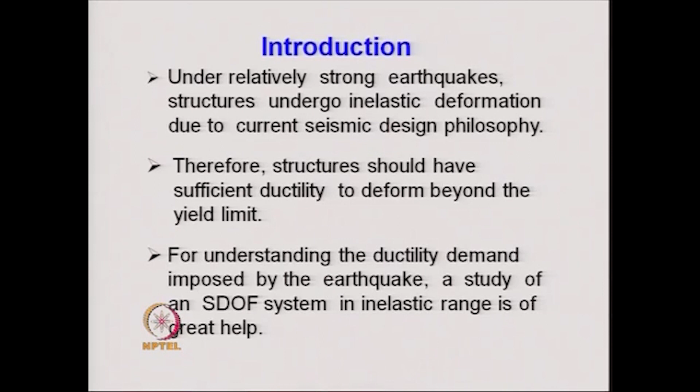Generally, the ductility demand imposed by the earthquake is understood with the help of an inelastic analysis of a single degree of freedom system, and that is what we will start with. However, the nonlinear time history analysis of the single degree of freedom system under earthquake is used not only for understanding the ductility of the material or system, but also to understand some more important things about the inelastic resistance of structures for earthquake, which we understand with the help of the so-called inelastic response spectrum.

Similarly, for the multi-degree of freedom system, the nonlinear analysis is useful in understanding the nonlinear behavior of multi-degree of freedom systems under earthquakes, and therefore the need for nonlinear or inelastic analysis of multi-degree of freedom systems under earthquake is also an important issue.

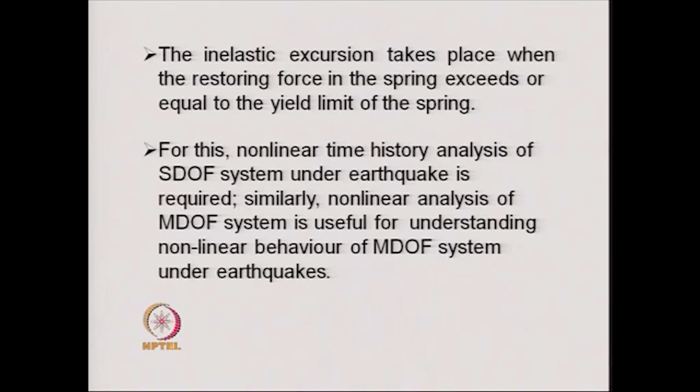In many cases, if we want to obtain the seismic risk of a structure, then one has to go up to the collapse of the structure, and therefore a nonlinear analysis may have to be performed for the seismic risk analysis of structures. The inelastic response spectrum, required to understand the inelastic resistance of structures to earthquake, constitutes an integral part of the inelastic response analysis of structures. We will specifically look into the ductility and inelastic response spectrum of earthquake subsequently while discussing this topic.

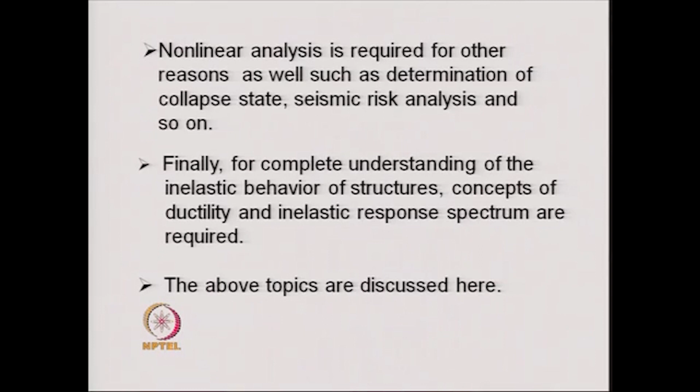Now, what we mean by nonlinear dynamic analysis here is that if the structure has nonlinear terms either in inertia, damping, or stiffness, or any combination of them, then the equation of motion becomes nonlinear. However, the more common nonlinearities that arise are due to stiffness and damping nonlinearity. Inertia nonlinearity is hardly encountered, so here we will be mostly talking about nonlinearities arising due to stiffness.

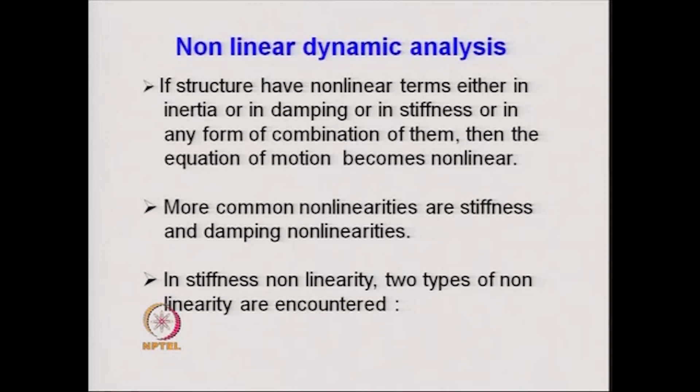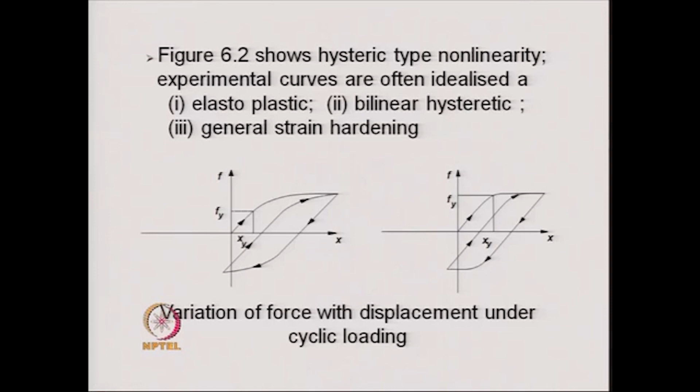The hysteretic type of nonlinearity is shown in these figures. The experimental curves that we get from the inelastic behavior of the structure during testing are of this type. Because of the nonlinearity, the loading and unloading paths are different, and as a result it forms a hysteretic loop. The area under the hysteretic loop, as you know, is equivalent to the energy that is dissipated. The experimental curves are idealized like this.

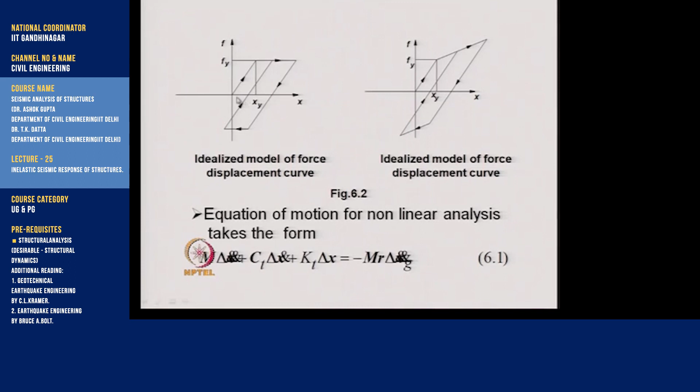The most common idealization used for the analysis is the elastoplastic model. That is, in the beginning it is elastic till the yield point, and once yield takes place it becomes fully plastic — under that constant stress, the displacement or strain continuously occurs, and then there is an unloading. So this is a bilinear model: we have an initial stiffness, and after the yield point the stiffness changes, following the top line curve, which has less stiffness than the initial stiffness.

And when it undergoes unloading, it undergoes a displacement or deformation which makes a slope parallel to the initial stiffness, or the slope we get in the load-deformation curve at the initial stage.

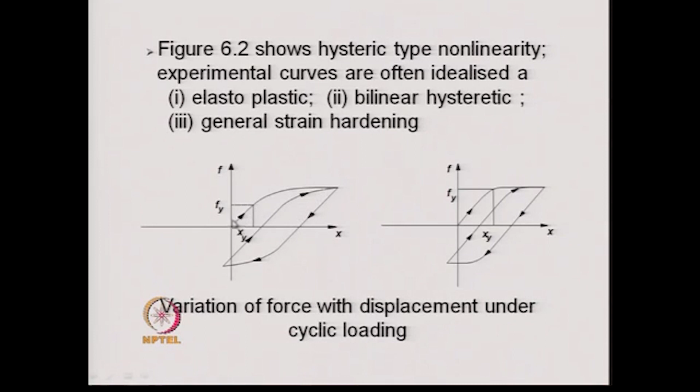The more general type of load deflection curve that we get is the general strain hardening curve. Here we have a curve that represents the load deformation behavior till it undergoes unloading, and at the state of unloading, the slope of the load deformation curve is parallel to the initial slope or initial tangent to the curve.

The equation of motion for nonlinear analysis is done in the incremental form. Equation 6.1 shows the typical equation we write for the solution of the nonlinear problem. It is the same equation used for linear analysis, but x dot and x double dot are replaced by delta x dot and delta x double dot, and Ct and Kt represent the stiffness and damping which change, having values Kt and Ct at the instant of time t.

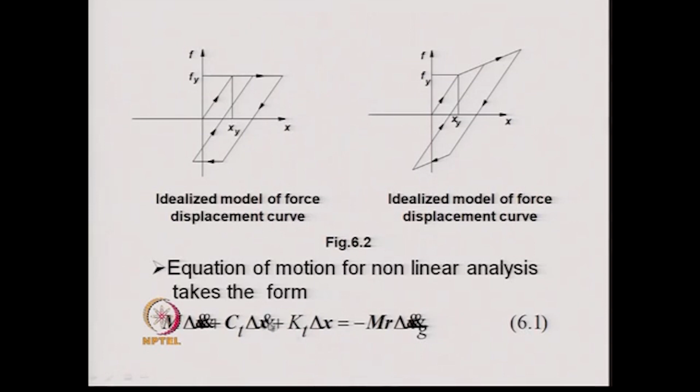These are called the instantaneous values of the stiffness and damping coefficient. The meaning of the incremental form of analysis is that during the delta x displacement, we assume the stiffness to remain constant during that interval, and the damping also to remain constant during that interval, and the entire analysis for this interval is carried out in the same way as we obtain the analysis for the linear system.

The equation of motion for a single degree of freedom system follows from the previous equation: m is the mass, and Ct and Kt are the instantaneous values of stiffness and damping. We write minus m delta x double dot g, that is the incremental ground acceleration that takes place within the interval delta x. Note that delta x corresponds to a time interval of delta t, that is, in the time interval delta t a displacement of delta x takes place, which is an unknown quantity to be found out.

Once we are able to solve this equation by some numerical technique, the same kind of solution can be extended for a multi-degree freedom system. However, generating KT and CT for a multi-degree freedom system involves some kind of complexity that we will address later. If we go for an analysis without the hysteretic type of nonlinearity, that is, the general or geometric nonlinearity shown before in this curve,

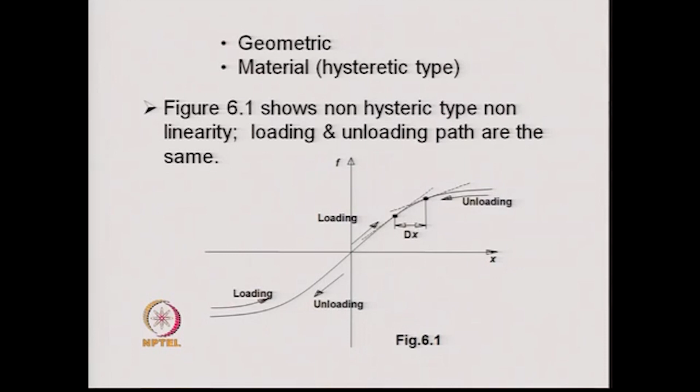Since we do not know this point, we cannot find out this average stiffness. If we wish to include this average stiffness, then one should go for an iteration: we start with an initial stiffness, solve the problem, and that gives a value of delta x. Once we get delta x, we can find this point and the stiffness there, then add it to the previous stiffness, divide by 2, take the average stiffness, and make a solution again. That gives another value of delta x, and that is how we carry out the analysis in an iterative fashion until we get convergence.

However, for a small value of delta t, this iteration may be avoided, and in most cases we take a sufficiently small value of delta t, so that with the stiffness taken at the initial point, at time x t, we calculate the value of delta x using that stiffness only.

Newmark's beta method in the incremental form is used for the solution described here. These are the two cardinal equations or relationships used in developing the Newmark's beta method. We discussed these two cardinal equations earlier when discussing the Newmark's beta method of solution for the linear system; there the difference was that these variables were x, not delta x. Here it is delta x.

So we write delta x dot equals delta t multiplied by x double dot k, plus delta t into delta x double dot. Similarly, we write delta x equals delta t multiplied by x dot k, plus delta t square into x double dot k, plus beta delta t square into delta x double dot. Now, from this equation 6.4, one can find delta x double dot in terms of delta x, x dot k, and x double dot k.

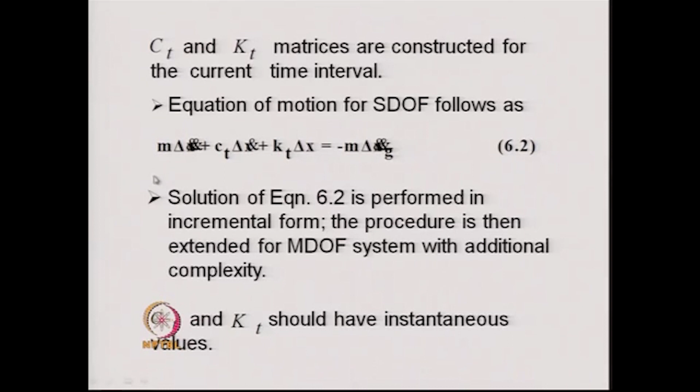Then we can substitute the values of delta x double dot and delta x dot into the dynamic equation of equilibrium, represented by 6.2. Here delta x double dot and delta x dot are written in terms of delta x, and finally we get an expression given by equation 6.7, written as k bar delta x is equal to delta p.

So the entire left hand side is now written in terms of an unknown variable delta x only, where k bar is given by this. You can see we know Ct and Kt, because they are the instantaneous stiffness and damping at time t, and m is known, therefore the entire k bar can be calculated. Delta p consists of the incremental earthquake acceleration minus m delta x double dot g plus these terms.

In these terms, x dot k and x double dot k are known because at time t these values are already known. So one can solve this equation to get the value of delta x, and once we get delta x, it can be substituted in equation 6.3 to obtain the values of delta x dot and delta x double dot. One can then find x k plus 1 equals x k plus delta x, x dot k plus 1 equals x dot k plus delta x dot, and so on.

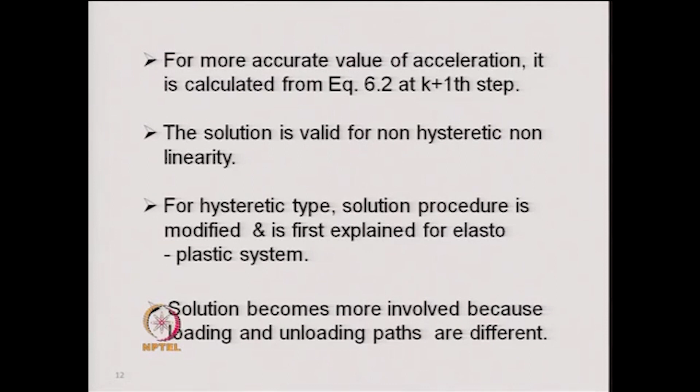Here the solution becomes more involved because one has to constantly trace the loading and unloading paths, or in other words, one has to constantly see the responses at every instant of time t to find out whether the state of the system is in the loading path or the unloading path. Therefore, we constantly track the responses of the system at every time step.

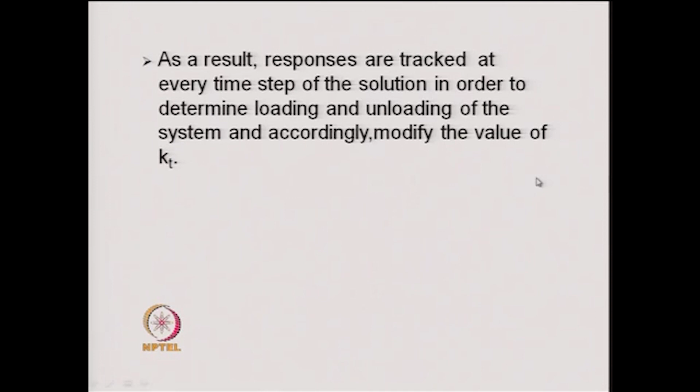When we use elastoplastic nonlinearity with the same incremental solution, we only concentrate on the material nonlinearity and assume that the damping remains constant, that is Ct is constant at all times. However, any variation of Ct, if desired, can also be taken into consideration in the analysis.

So far as KT is concerned, in the elastoplastic assumption, either the KT value will be equal to K, the elastic part of the curve, or KT will be 0, that is the plastic part, the horizontal part of the force deformation curve. Depending upon whether the state is elastic or plastic, in both loading and unloading conditions, the KT value should be properly taken into account and constantly monitored.

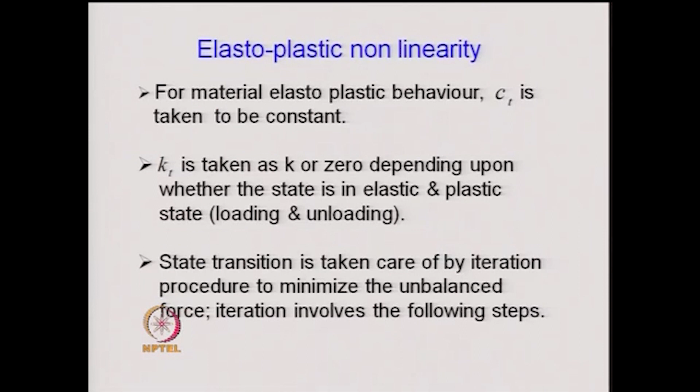Now, the most crucial part of the solution is that when the state of the system moves from one state to the other, that is called state transition. In that case, we carry out some iteration to minimize the unbalanced force. The iteration involves typically the following steps.

Say we are moving from elastic to plastic state, that is we have a displacement, and for that displacement we check whether the spring force, that is K multiplied by the displacement, is equal to the yield limit or not. If it is less than the yield limit, then it is purely in the elastic range.

Now, when we come near the yield point, the incremental solution in the first place may give a value of delta x, represented by delta x0. We find that when we add delta x0 to the displacement at the previous time step, giving x at t plus delta t, or x k plus 1, that value multiplied by the initial stiffness of the system gives a value more than the specified yield strength, that is, the solution x k plus 1 exceeds the yield point.

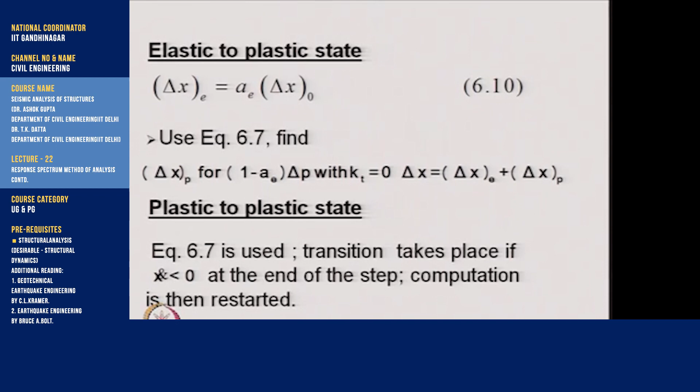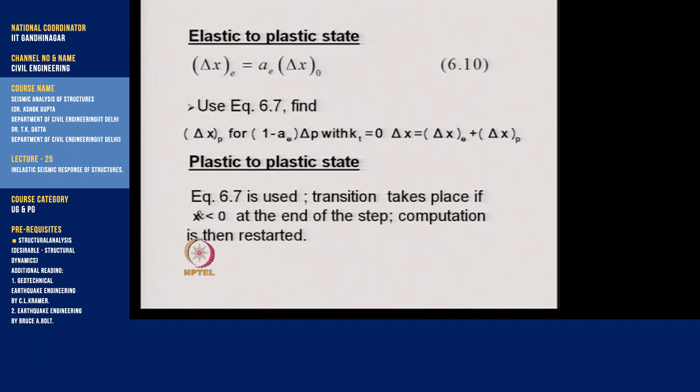Then we say delta x e is one part of the solution, and the next part is obtained again using equation 6.7, the incremental solution. But in that, KT is made equal to 0, not K, because the rest of the solution lies in the plastic zone. The loading on the right hand side will be equal to 1 minus A e into delta P, because the A e into delta P part of the loading corresponds to the displacement delta x e.

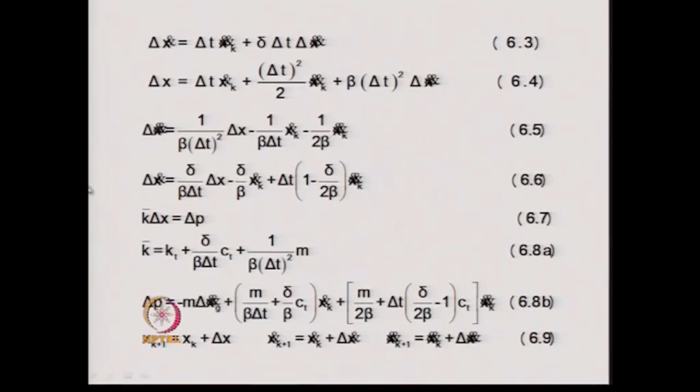Therefore, the rest of the loading is utilized in finding the value of delta x p. So in finding delta x p using the incremental equation, on the right hand side, the delta P, the incremental loading shown in equation 6.7, is replaced by 1 minus A e into delta P, and KT is set to 0, and from there we can get the value of delta x by solving that equation.

That delta X is called delta XP. Then finally, the value of delta X for that increment is equal to delta XE plus delta XP. So, that is how we take care of the transition state, that means the transition from elastic to plastic state.

Now, when the system moves in the plastic to plastic state, we constantly examine the value of the velocity. So long as the velocity of the system is positive, the system is still moving from one plastic state to another plastic state. At the point of transition, that is when it unloads, the value of the velocity becomes negative.

So, near the transition point, if we solve the incremental equation 6.7 by setting KT equal to 0, we get a value of delta X, delta X dot and delta X double dot in the first instant. If that value of delta X dot is added to the velocity X dot of the previous time station, it gives a final velocity which turns out to be negative. That shows that unloading has taken place at some point within delta t.

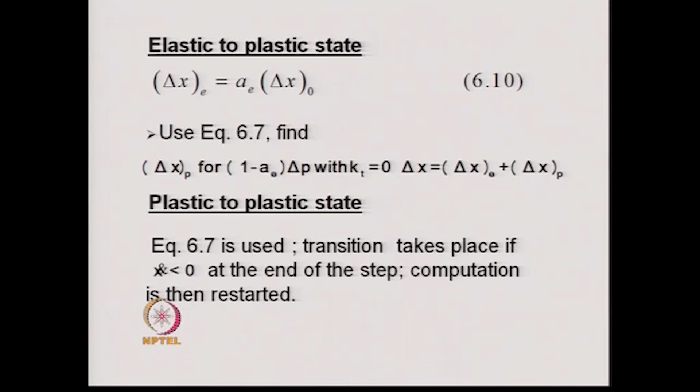So, we have to trace that point. The transition from the plastic to elastic state takes place when x dot becomes equal to 0. In order to trace the transition point, the delta x obtained over the time delta t is factored.

So that the displacement at the transition point is equal to A into delta x plus the value of the displacement at the kth time station, that is x k plus A into delta x. Then one can obtain the velocity at the transition point as A into delta x dot plus x dot k.

Since the value of the velocity at the transition point is equal to 0, we set A into delta x dot plus x dot k to be equal to 0. From there we can find the value of A as minus x dot k divided by delta x dot.

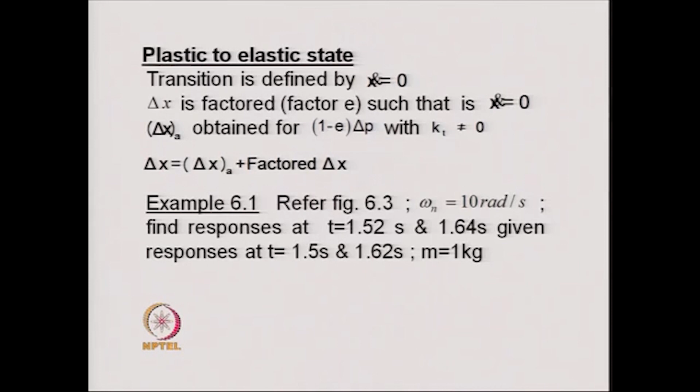This kind of iterative solution to take care of the transition point is many a time avoided by making the delta t sufficiently small, so that even if we miss the transition points, the response we compute does not become very erroneous, because the errors obtained are of very small magnitude. Therefore, many a time we solve this problem by taking a smaller increment of delta t and carrying out the entire analysis. However, that requires more time. Let's clear this concept with the help of an example.

This is a single degree of freedom system, and in this system, the force developed in the spring follows this curve, in other words this is a nonlinear spring, and the force-deformation behavior is given by this. It has a yield point, or yield value of Fx, and the corresponding yield displacement. It can get unloaded at any point of time, and Ct is assumed to be constant.

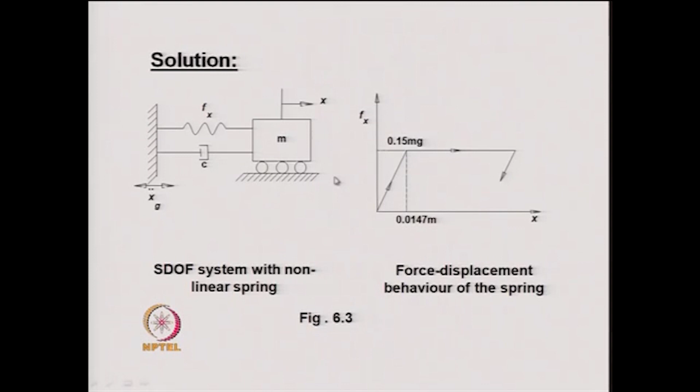In this problem, it is given that at t equal to 1.5 seconds, the values of x, x dot, and x double dot are given. Also the value of Fx is given, and Ct is given, which is constant. The Kt, that is the stiffness shown here, is also given.

Now with these given values, we see that the displacement and the velocity are both positive, in other words this is the increasing portion of the displacement, and the initial Fx value is 1.354, which is less than 0.15 mg, mass times acceleration. Therefore, yielding has not taken place.

So what we do is find out the value of k bar, keeping the value of Kt equal to k, and we obtain the solution. From that we get the value of delta p and the corresponding delta x and delta x dot, and we calculate delta f. Delta f becomes equal to Kt multiplied by delta x. Now, when we add this delta f to the initial value of Fx, that is the spring force at time t, then the spring force at time t plus delta t becomes equal to 1.7243 N, which is greater than 0.15 times mass times acceleration.

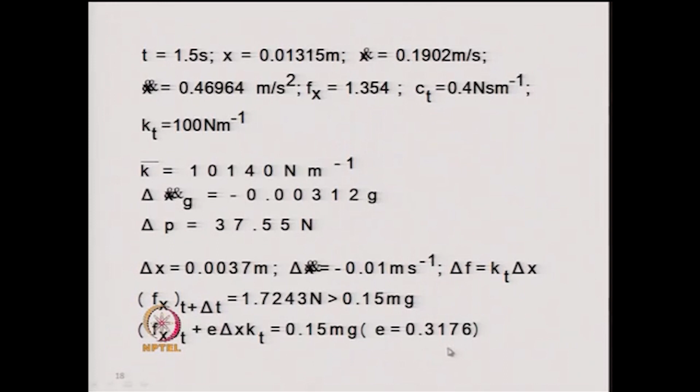Once we get the value of E, one can find the value of 1 minus E into delta p, which becomes the right hand side, and we do the second part of the solution. We write the second part as k bar into delta x 2 equal to 1 minus E into delta p, and in that Kt is set to 0, because this part of the solution is on the horizontal portion of the load-deformation curve, that is the plastic range. The solution provides a value of delta x and delta x dot, these values.

Once we get the values of delta x and delta x dot, we write x at t plus delta t, that equals the initial value of x at t, plus the first portion of the delta x displacement, the factored displacement, plus delta x 2 from this solution. This gives the final value of x at t plus delta t. Similarly, one can find the value of x dot at t plus delta t, which becomes equal to 0.1827.

After you have obtained the value of x at t plus delta t and x dot at t plus delta t, or in other words x k plus 1 and x dot k plus 1, one can find x double dot k plus 1 by solving the equation of motion at the k plus 1 time station. Here we are not using the incremental equation anymore, but the full equation at k plus 1 is utilized to find x double dot k plus 1, and that value is 0.279 meter per second square. This is done to minimize the error that can come from not satisfying the equilibrium equation at an instant of time t.

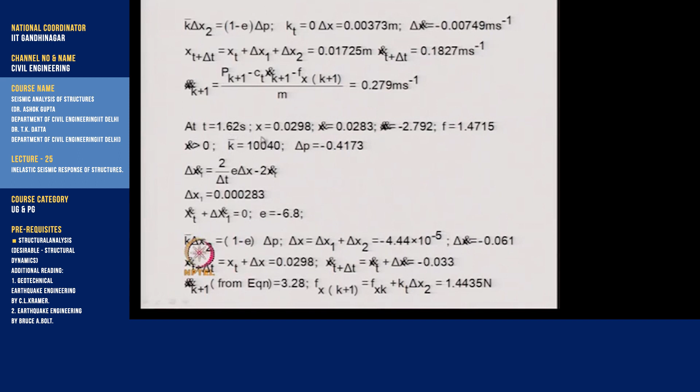At time t equal to 1.62 seconds, we have the displacement given, the velocity given, the acceleration given, and the force equal to 1.4715, equivalent to 0.15 mg. So we see that x dot is greater than 0.

So it is increasing in the plastic state. We calculate k bar by setting k t equal to 0, and this gives the value of k bar, with delta p known. We obtain the value of delta p by knowing delta x double dot g, x dot k, x k, etc, and from that we get a value of delta x.

That particular value of delta x is found to provide a value of the final velocity which becomes less than 0. This means a transition point has been crossed, or in other words, unloading from the plastic state to the elastic state has occurred.

Once that has occurred, we find a revised value of delta x1, a factored value of delta x, obtained as shown. Then by setting the velocity at the transition point equal to 0, that is x dot t plus delta x dot 1 obtained from this factoring, plus this, equal to 0, because at the point of transition the velocity is equal to 0. This provides a value of E equal to minus 6.8, and once we get the value of E, one can proceed to the second part of the solution.

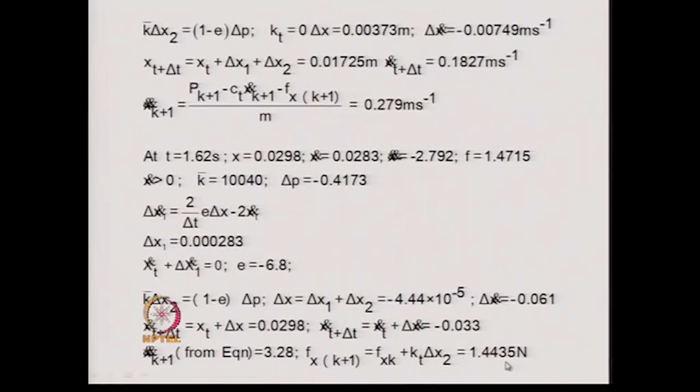Also, one can find the value of the force induced in the spring, equal to f x at the kth time station, which was 1.4715, plus k T into delta x2. So long as it was in the transition zone, f x equals 1.4715, and when we add the elastic part of the force, that is k T into delta x2, we get the force equal to 1.4435, which is less than the yield stress, as expected. This is how one can carry out a solution incrementally and take care of the transition point.